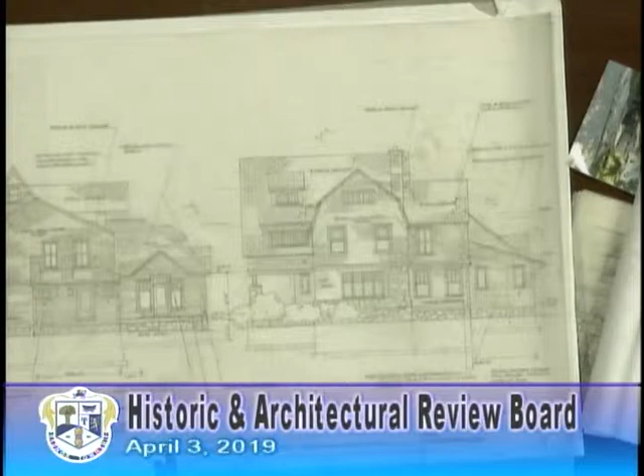I did have the pleasure of seeing a house on Walnut Avenue, 225, that had a carriage house, original carriage house in the back, that actually had horses and carriages. And it was like a little mini-me of the house. And I thought to myself, that would be really neat to reproduce that if I ever get a chance. Well, I got the chance. So this,

It's not in focus. I did a freehand perspective of what the garage is going to look like from the corner of Beech Tree and Oak Lane. So this is what it will actually look like in 3 dimension. I just did this freehand. It's not very, but it explains where the garage is going, towards the rear and towards the side, off of an existing macadam driveway.

So I copied as many of the roof lines as I could that the original architect would have done. We have windows. We're copying some of the windows. Let me show the elevation of. I need the white paper.

See, the garage doors are going to be carriage house doors, typical for this era. The roof is a gambrel roof, and there's a reverse gable cut into it. The windows for more storage. All the soffits have the rafter tails exposed to mimic the house.

Windows, we're choosing. This is the side elevation that faces Beech Tree. We're using windows. These are repeated in the house. You find this exact window in the house. And this window facing the other side, the yard, is this elevation.

And this is the rear elevation facing the stream. So the rear neighbor would see this elevation. It's just garage storage and storage above with a pull-down ladder.

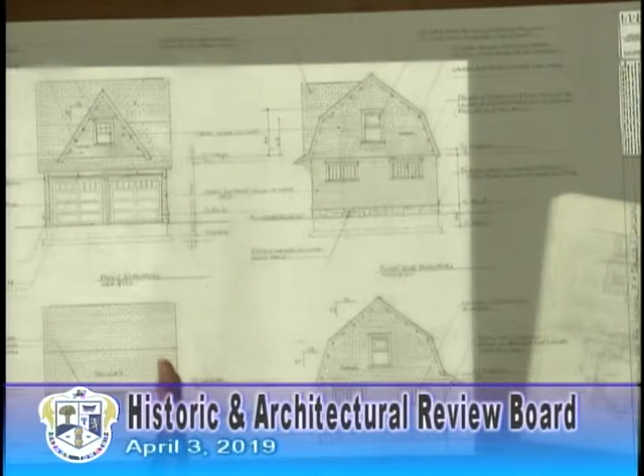There are architectural details like brackets to support a little roof overhang at the doors, which is what we have at the rear of the house. There's also a little scoop where the siding meets the stone, the transition between the two on the house, and I've replicated that here.

The colors will match the house. Windows will be simulated divided light. I'm not sure what company we're going to shop for the best value, but the color will match the house again, so it'll be the same type of window.

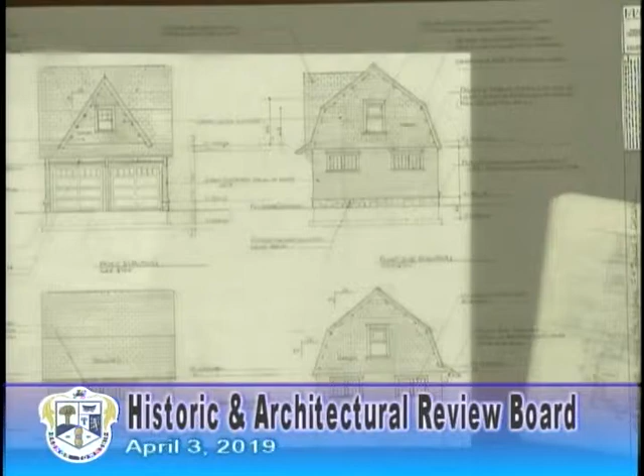I would like to make a motion that the HARB offer the commissioners a recommendation for a certificate of appropriateness. I'll second that. All those in favor to recommend appropriateness? We have 4 yeses, so the certificate will be offered.

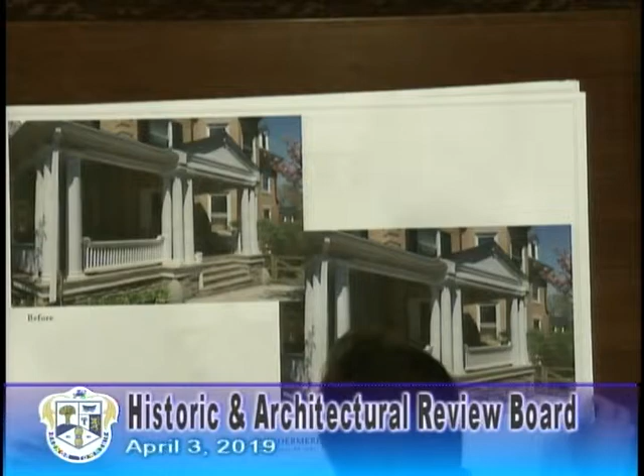The main change that can be seen from the public right-of-way involves this photograph right here, with the addition of a driveway down the east elevation. The upper left photograph is the current condition, with existing steps down to the existing drive. The photograph to the right is what we propose, as we will be lowering the grade with civil engineering to provide the drive down the east side.

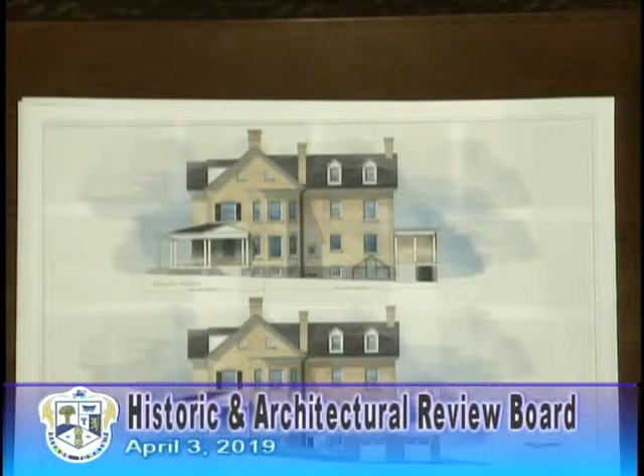You can see we're replicating the existing railings and infilling the stone steps with stone to match the adjacent. This is really the only portion of the project that can be seen from the public right-of-way. I'm happy to take any questions. There are two elevations of the east side where you can see the change as well, existing and proposed.

What's going to happen to the stairs on the side porch? They're going away when the excavation takes place. Are they going to be moved to a different area or just removed altogether? That is the east elevation.

Those side steps will be removed altogether. We'll probably save the stone steps for the owner if they want to reuse it elsewhere. There are steps on the front elevation to provide access to the porch that will remain.

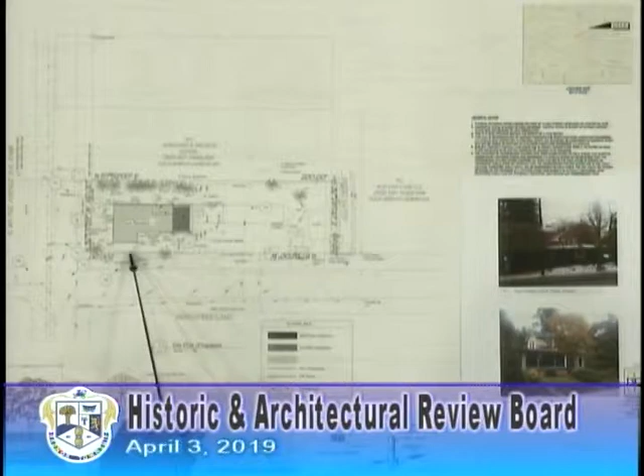This is a unique property for these types of lots, in that it's a corner property, so you do see quite a bit of this addition. This light gray is the existing house, and this is all 2-story, and then this little section here is a 1-story shed roof that points that way. Our intention is to take this and make it 2-story with a darker section here. That's a 2-story piece, and then there's a 1-story underneath with a porch facing the rear, so the scale of this is all in scale with the rest of the property.

Here's another one of those exact same houses.

I would just like to make a comment on this property. When I did some research on this house, as far as when it was built, it kind of varies. The Radnor Historical Society says 1884. Township records say 1880 to 1890. Property records for Delaware County say 1880. But also according to Radnor Historical Society records, this was a small cottage that, obviously, as you're sharing today, has been altered. But at least as far as their records explain it, this is a small cottage that was built at its earliest date in 1880, just to give some perspective.

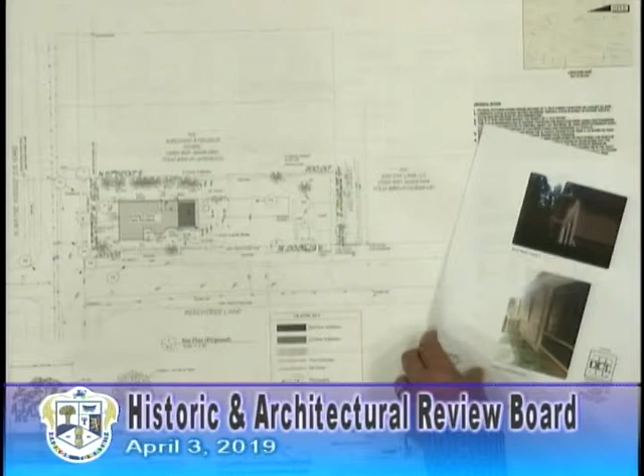That's right, and you'll notice this one is pretty much original equipment. The one next door was done over maybe 5 or 6 years ago, but kept most of the main cross gabling and porch that the originals had. This elevation, you can't see anything, no one's going to see that. But as you come down Beech, you're going to be able to see this rear elevation and this side elevation. It is very exposed.

So I wanted to go through this existing condition, since the pictures don't really show it very well. This is the Beech Tree elevation, the south elevation, and this is the addition that was put on a little while ago. This is the 2-story section in the rear, and on the other side, if you flip it around, that's the little shed section, which is the infill. So we're going to infill that and add another piece here. On the rear elevation, that's the little shed piece we'd be filling in. This is normally an open porch slash utility space, but the sheds usually go in the other direction, so this was redone at some point as well.

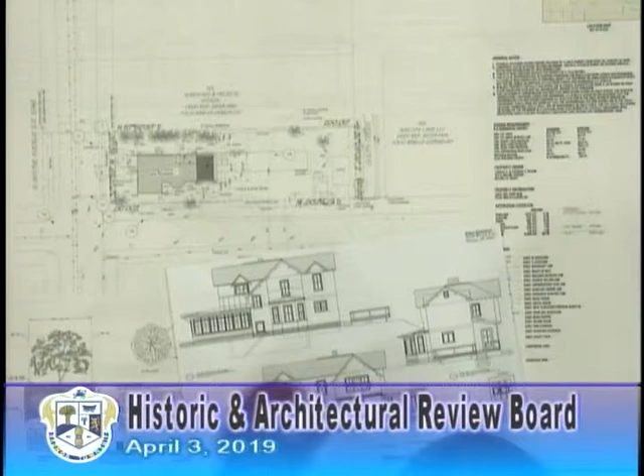And then there's another drawing that shows some demolition, what things are changing, that you guys have, and into the elevations.

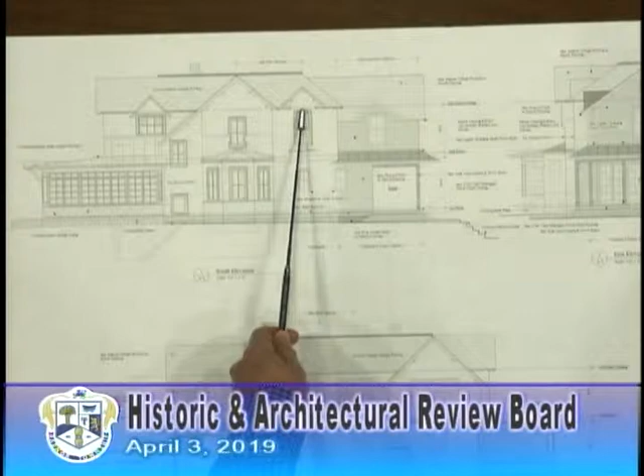That main south elevation is this one, and you can see we're adding this piece, but we're stepping it down. I want to maintain that this main roof line keeps the highest peak, and that we go down but use elements that are within the roof line again. And then this porch, so basically they're expanding a kitchen area and adding a bedroom, and then you get an outside porch here that steps down to the lawn.

From the rear, it's the same sloping and same bracketing detail with the lookouts. It's a stucco building right now. We'd love to introduce it, a lot of these have shake and siding and a mix of things. I don't think they're going to have the budget to redo the whole house or the second floor level, so right now it's planned to just match what's there, which is a stucco finish, with some standing seam metal on this roof line matching the front that's been redone.

And then from the other side, the north side, which you can't see, this is the infill over the shed, mimicked on the other side. So you're maintaining this main roof cap by taking that slope and pushing it out, then stepping down and doing this gable. What I'm trying to do is maintain the original scale of this thing. This is an addition, and it is a smaller scale, and that's the idea behind it, but reusing all the different elements, like exposed rafter tails and things native to the house as it was originally.

So the beveled clad columns throw me a little bit.

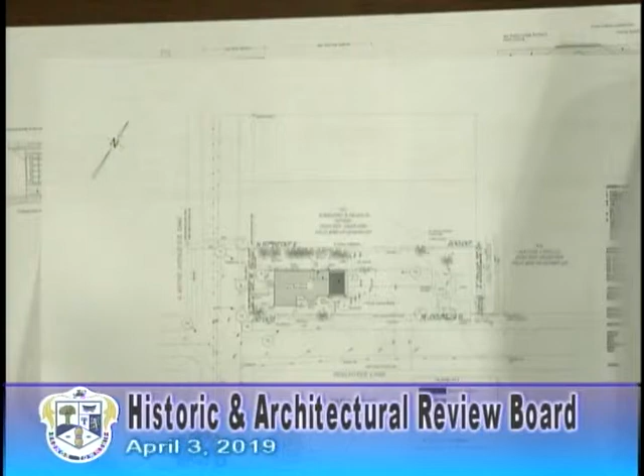If you look at the footprint here, that piece is not large compared to this. It's still, if you looked at square feet, it's probably less than a quarter. But I'm looking at perception, because square feet really doesn't matter as much when you're walking down the street. So if that is 1/4 of this whole thing, to me, that's the max. That's where you go.

Where's that line? Where is it acceptable—is it here, is it there? Cam, what's the criteria for that? The footprint that you showed us includes all of the porch, does it not? I think that's a little disingenuous—no, I'm talking about where the house actually starts. Oh, it did start from there? It seems so much bigger in this elevation than what it is in the footprint.

But I'm looking at, this is sort of low and down and not original, so I'm looking at the main house. In relation to this whole mass, that's trying to be 1/4 of that, and that's what we've come up with. So that's just the guideline that I use, and I think it's pretty effective. It gives people what they need to do, realizing what they need to do in their houses.

I'm sorry, I do not buy the argument that people must put on an addition. They could just buy a bigger house, so let's not go there with that one.

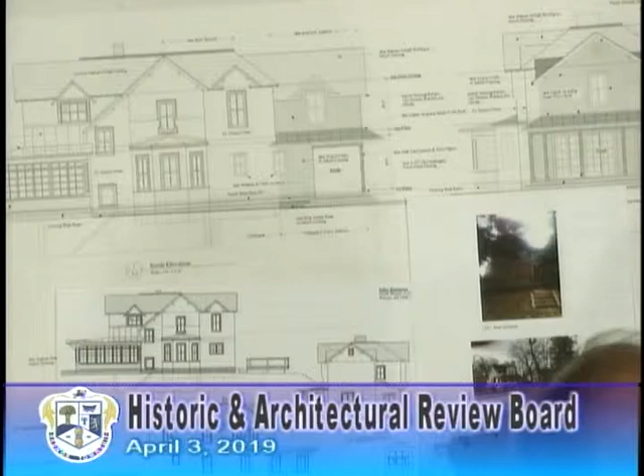I'd like to make one comment, and I'll ask my fellow board members: if a Supreme Court justice were to step down just because he wanted to go back into the regular practice of law, wouldn't you think he'd have a better chance because he had been on the Supreme Court and knew the law inside and out?

We've had two unusual things tonight. One is a representative from John Milner. John Milner is probably the best known living restoration architect. He's sought after everywhere, and he's made his reputation throughout the region in restoration. When I joined the board, Harb, and this may be my last year, I've lost count, Cam was chairman. He's so well aware, and he's also an architect, which gives him the advantage that we don't have of being on site with regard to the spatial relationships and being very familiar with what we're dealing with as HARB members.

On that alone, I'm going to have to say I would be in favor of accepting this plan, because I think you know what you're doing, and you know what we're looking for, and I think you've worked to make this the best possible plan. Well, thanks for that.

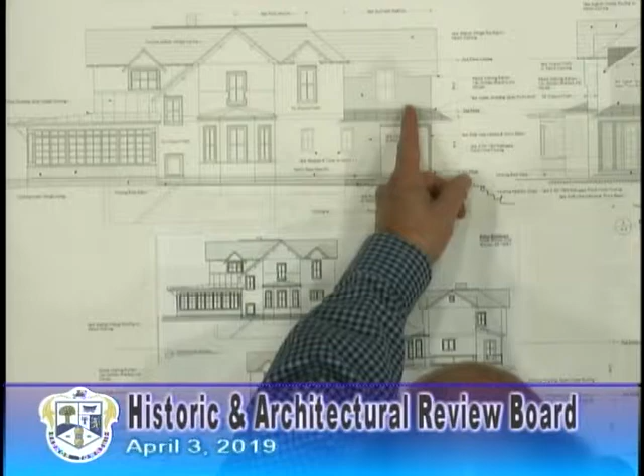I'd be curious, would the house owners entertain perhaps a smaller addition? The question then becomes, what is that? Does that go to there? Is that enough? To there? How do you quantify that? To me, this is... I wish I could, but you know what? I can't. I know, but that's what I'm saying.

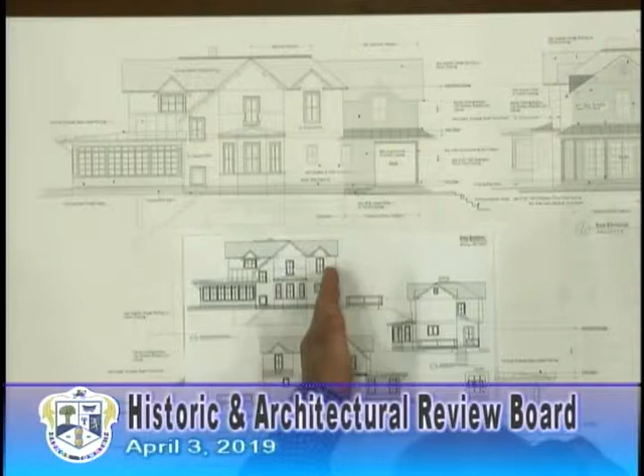So if I look at the existing elevation, it has cross gabling and all kinds of interesting things going on, and it's cut right there. So to me, you've got all these things that step down and do things towards the front, but it's chopped off right here, two and a half stories, boom, you're looking straight up. This breaks all that up on the rear. To me, that's my feeling, is that it does the things the client wants, and it softens that line on the original house and brings it down to grade level, because you're coming from the main roof, which is lower, second floor walls, then you have a skirt shed roof that wraps around, which softens that. It sits in that.

The second floor sits in that. And then the first floor is not a full build-out, it's got some air in there. And then you step down, it's a wraparound steps that go down to grade. So the whole thing is trying to just sit and go into grade and be smaller.

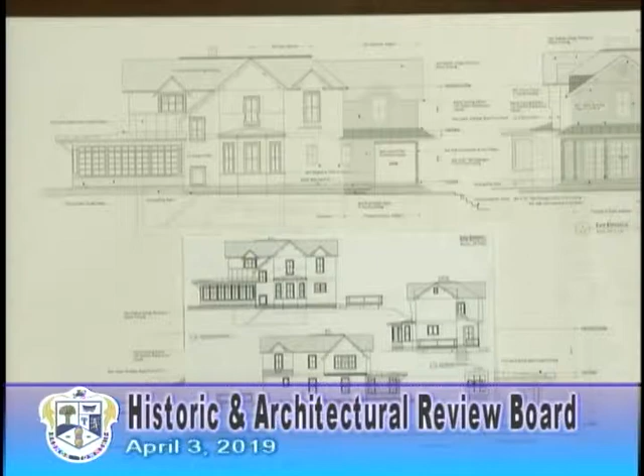I do appreciate that argument because the way that you presented it, it looks like something's missing on that side, considering how the house has been altered over time. It's almost like when I look at a typical flat roof of a house, I always think there's something missing. So I do appreciate that illustration.

Well, that's why we thought that was probably an appropriate thing to do. I don't like to see, to me, it's kind of like, well, what was here? In a way, you could say, well, wasn't there something here? But there wasn't, but it needed something, even if it was just a shed or whatever.

Same thing on this side, it's the same idea, you're just set back a little bit. From the rear, you can't really tell because it's just a flat elevation. But when you're there, it definitely looks like it wanted to be a little bit longer.

I can certainly look at this space and see if it can be pulled this way a little bit more. But again, I don't know what that magic number is for you guys.

First, I want to address something that was said before, and this is not about the design. Cam, you have provided incredible service in your public duties as well as your private professional duties. But we're not here to be a rubber stamp to somebody who's sat in our chairs before. I think it is our responsibility to the community, just as it was for you, to have these kinds of discussions and determine whether or not we think the Board of Commissioners should move forward with this or not. Now, all that said, I don't have an issue with the scale.

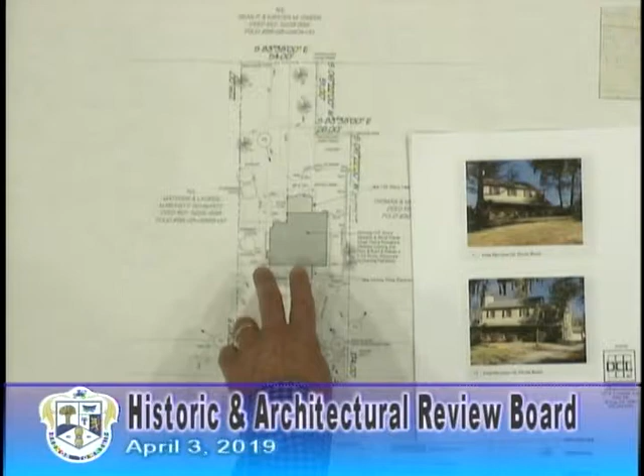So the existing footprint is this. The front porch and second floor main gable is here, and then there's a small kind of family room addition off the back. There's an existing garage.

This is St. David's Orchard, and this is a fairly sloping site, as you can see here. The driveway comes back, and there's a little terrace back here. You can see the building envelope is sort of...

You could never do this today, but the rear of the house - this used to be the garage, and then they added this and added a few things, and this is too big and so forth. That is the main house that used to be, I think, the main house on this property, which sits right here adjacent, and you can see a lot of the big gabling on this.

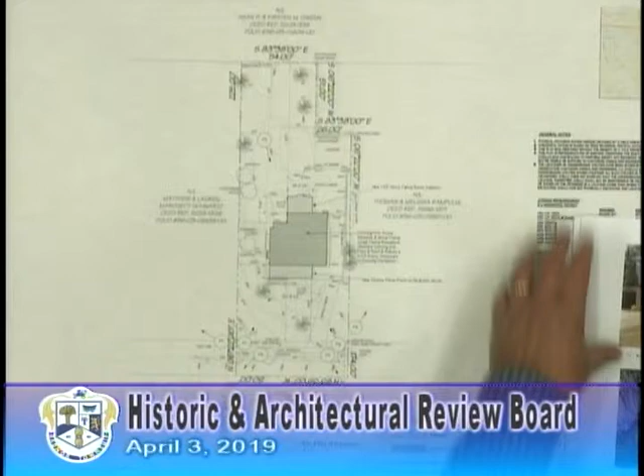This also has some Tudor detailing on it, and there's a round piece. Across the way, you've got similar detailing that we're talking about - standing seam, shingle. This is a double column detail, really interesting chimneys.

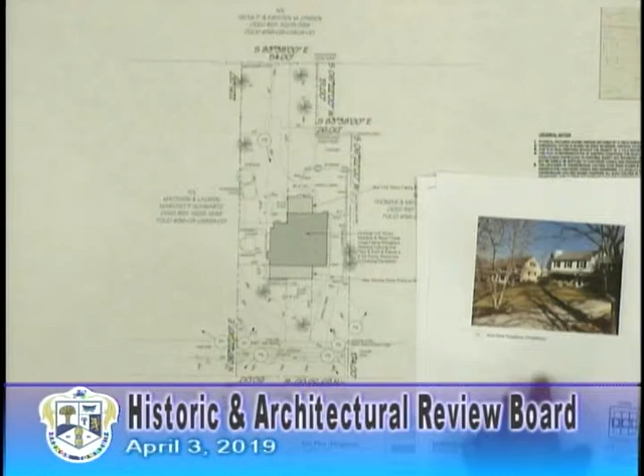And then this is the neighbor on the other side here and down. This is a very similar house, and then this one is a bigger version, and then they go back into the traditional stuff. So I gave you this because it's a little bit easier to see - I think this picture tells everything as to what it is, and that's what you're going to see.

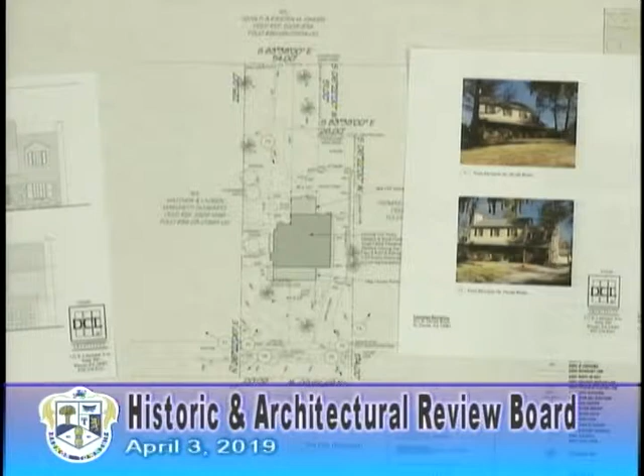The side is really hard to see anything, so what I provided was a front elevation and a sketch of the rear. And I've updated this as well, which I can hand up if you need it.

But I'll talk about it first, I guess. Let me do that. This would be the front elevation, this elevation. And this level here is maintained as a flat wall that steps back and goes into that old garage area.

Everything from here up is all new. So the idea was, South Wayne, North Wayne, they're porch communities, get back a porch that's up on the hill overlooking everything, switch out windows for doors so that inside becomes outside, and then get living space above that. And this red line is what's there now, which we're taking down.

So we're raising this and making it a little more, it's a steeper roof line, which is different than this. And I'll show you this. You can see the side elevations. You can't really tell until you look at the side as to what's going on here.

But this kind of a roof line is inappropriate for this area. And then you've got a really large continuing one, and then some sheds. Nothing's the same, so there's not a lot that we want to respond to in this house. We want to take the toolbox of the neighborhood and say, let's do something that really brings all these things together, and we'll do it in the same footprint, but they need a little space out the back.

And the front, porch community, you got to have that. So we did that. And then the rear, all very similar detailing. Some sheds, some porches, some space up top. I'll ultimately talk about this a little bit more.

So the idea was to get this porch with stone pillars, and this is kind of an arts and crafts column. I have an option to do a big round, beefy one, which I think looks better. So I think I've got that to show you. I think that's what we're going to do. And everything else is the same in the main part of the house.

This roof line changed a little bit, and then I have a shed coming off of this roof to meet this wall, because this roof line didn't want to do that. It wanted to be steeper and a little higher, and it also wanted to, on the backside, mate with the other roof in the same plane. So let me give you what I have that's different.

Cam, is that fireplace going away, the one on the side of the house? Yeah, that one. Was that an addition that's being removed? It was put on to the garage. Okay, so that's going away. The main one is staying, and then we're adding one.

So that's what -- this fireplace is going away, that one stays. So we're going to end up raising this flue, and whatever material this is, we're going to do something special from that rise. It might be a band of flag, it might be some brick pattern, but that's kind of like whatever the chimney's made of, and if it's good enough, we're going to respond to that and make it really interesting.

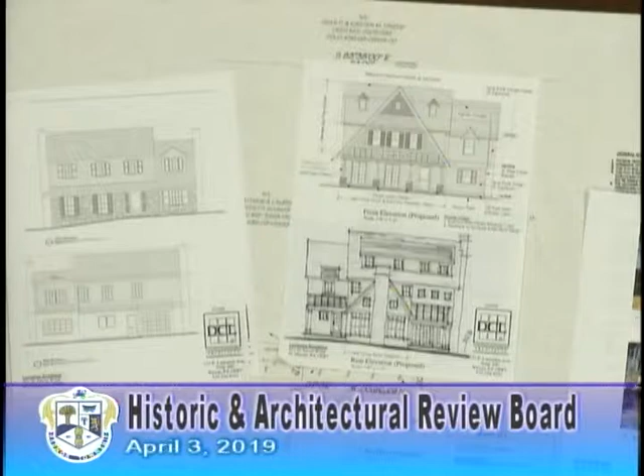Cam, I have to say, I think that this is beautiful. I think it's a great design. Without being able to say that it is taken from one particular style of architecture, I think you have incredibly captured so many different elements that are found in the neighborhood that really are indicative of the feeling as you're driving around. I think you did a great job on this.

Well, thank you. I mean, that was the idea, is that this is like a bigger gable than some, but that's what we wanted to do, is to really make that stand out. So the rear, you can see between these two, that changed, that area. Everything else is pretty much the same. There ended up being a shed line in here too. I forgot that this little section pushed out a little bit. But everything else was the same there.

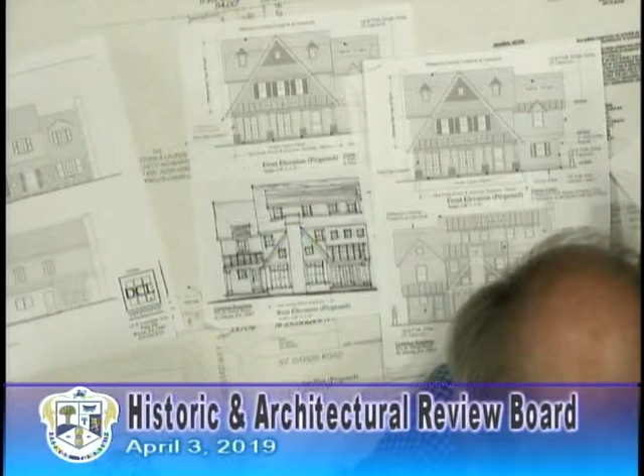The second sheet of this is the side elevations, and you can see how the roof lines are steeper. This is that big gable that comes off. And if you look at the gabled ends and some of those other ones, and you sort of drive past them, you see the big roof, and it's really impressive.

But you never see this view, which makes this thing look so big that it's just out of proportion. But it's what those other roofs do. They're just the whole front of the house. So it really is not out of control there. But the idea was to get away from this kind of a slope into a steeper slope and have things mate and move back.

And the first floor, again, there's either a stucco or a stone base, depending on what we can do. Band board with a water table, 4-inch clapboard, which is either cedar or HardiePlank. Then you have another band, and then you go into 8-inch exposure cedar or HardiePlank again, in a cedar shake look.

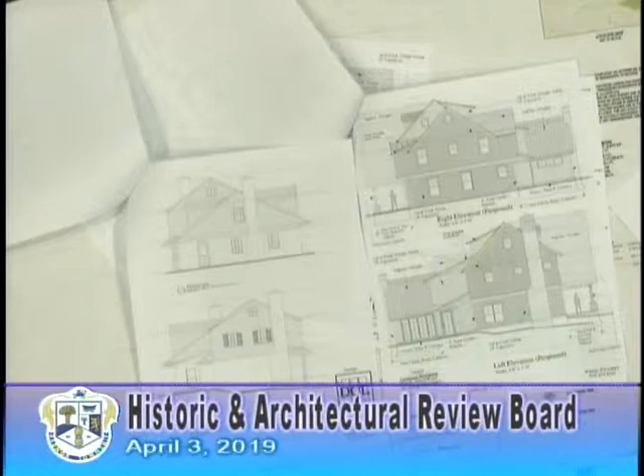And the only other thing that's different is that this section, we're taking the second floor and overhanging. You can see there, second floor pushes out in the front, the side, and the rear, and we end up adding these heavy flat brackets that you see occasionally around. So you get a band, but you also get a soffit and a bracket.

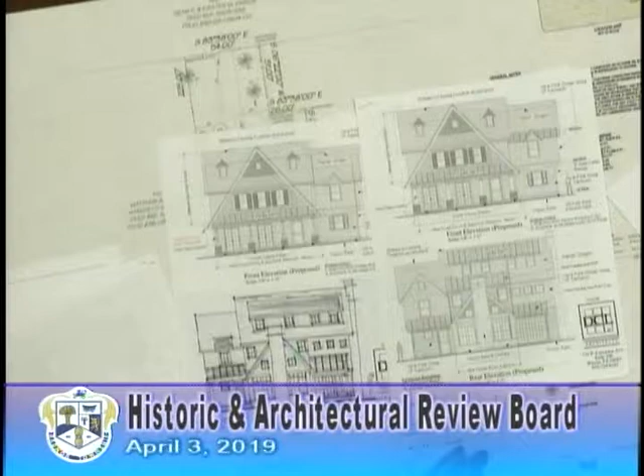So what I'd like to do, between these two, is go with this bigger round column, and I may even get fatter. I think this roof really can take it, and it'll look much better. This is more of an arts and craftsy thing. I've done something similar, and it looks better on a smaller scale. If I scale it up, it becomes the thing you look at, and I don't want it to be the thing - I want it to be part of the whole. I think this does a better job of it. This holds everything up. I agree with the round columns.

They seem to be more prevalent in the South Wayne Historic District. So, let's see - yeah, so this series just shows the round columns.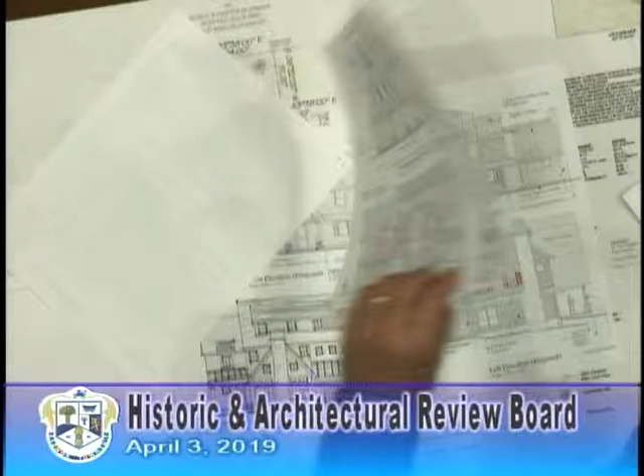That's the only difference. And then the last one just has some overlay to show you what's being taken away versus what's there. But the idea that we're taking the second floor and the roof line off pretty much tells us we're doing the whole house over. So I think you need that one for real.

One comment, I agree with what Miles had said. If I was a neighbor, I would be really happy, really happy camper here, considering what's there, because that house sticks out in its way. Also, two other comments - there are many steeply pitched gabled front roofs in that area, including the house at 423 St. David's Road, which is on the right. So that was probably the original manor house, I'm assuming, as you were describing it. And then lastly, in my opinion, the proposed front design is a positive enhancement and contributes to the overall character of the neighborhood.

That was the game plan, so hopefully that'll work.

Thank you. I would like to make the motion to recommend a certificate of appropriateness, and if possible, a certificate of commendation for adding to the visual aesthetic of this district. Thank you very much. I don't think that's in there - you can't do that, but thank you.

I'll second. All those in favor? Looks like everyone is in favor of this one. Good, thank you. I like the fat posts better too, yeah. And like I said, we may make them a little fatter - I'm going to go scale it and see what it looks like, but I think at least that, and not 4 feet. I didn't want to say this prior to the motion and subsequent vote.